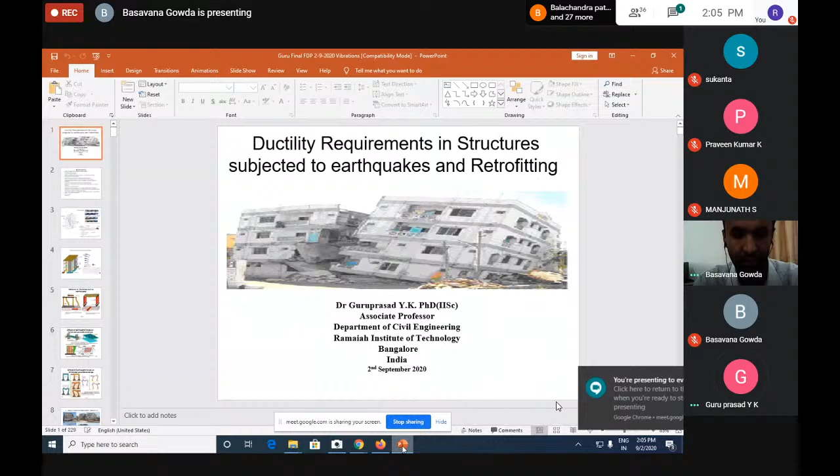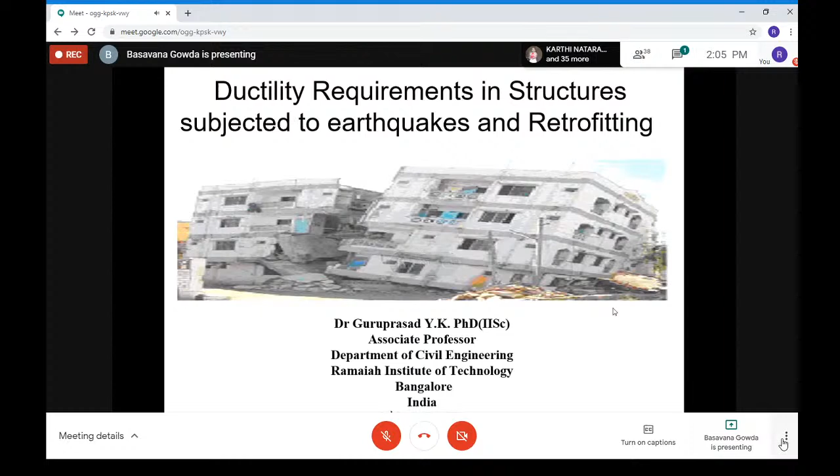I'm Dr. Guruprasad, working as an associate professor in Department of Civil Engineering at Ramaiah Institute of Technology. Today's talk, I'm going to give on ductility requirements in structures subjected to earthquakes and retrofitting.

In the morning today, you would have heard Professor Anand about various aspects on retrofitting and on earthquake engineering. But for the present session, I will be talking more in detail on ductility requirements. I will not go into too much mathematics, because earthquake engineering and structural dynamics are subjects where we make use of a lot of mathematics to get the physics out of the problem.

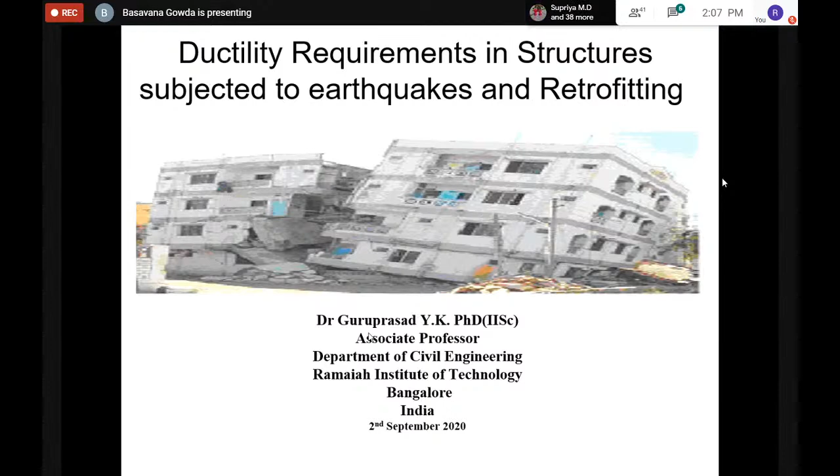So today I will be talking on ductility requirements related to earthquakes, its importance and retrofitting concepts. I would like to also put across that I would not go into too much mathematics. I would stick more to applications and figures which I put across in my entire PPT, such that it is more understandable to all the participants who are from a different range - it may be a professor sitting across, or it may be a student too, from a BTech to an MTech level. So the contents of my presentation goes like this: sources of damages in RCC structures causing instability.

Irregularities in RC structures because of earthquakes, the different types of irregularities which exist, concept of ductility in structures, methods of implementing ductility into a structure through conventional methodologies during the design phase itself, strong column weak beam concepts and pushover analysis. These go in detail into hinge formation and ductility concepts.

A case study will also be presented to you which has been worked upon, and a capacity-based design on hinge formation and stability of a structure subjected to earthquakes - how we are going to implement the concept of weak beam and strong column, and adopting this, how we are going to design based on capacity-based design, I'm also going to talk about.

Assessment of damage in a structure and its members, adopting NDT - non-destructive testing - for damage due to earthquakes, repair and retrofit measures to restore back the stability and strength in distressed RC structures or distressed RC members that have been damaged due to earthquakes, global and local retrofit measures.

One case study of a global retrofit measure, and also a case study of a local retrofit measure which is going to be presented. Passive control techniques - that is earthquake controls, structural controls, what we have in passive controls I'm going to talk about - and conclusion.

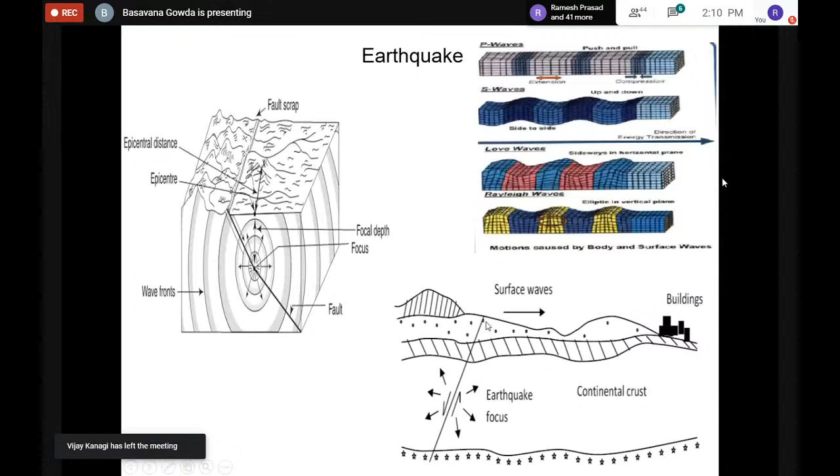Now, the behavior of buildings due to earthquakes is through inertial force action. The earthquake force acts in one direction, but the basic behavior of a building is not to go along with that—there is an inertial resistance force. As we understand in the concept of dynamics, there is an excitation force, and to counter it we have an inertial force, a damping force, and a stiffness force. So to put it simply, there is an earthquake which acts and the building tends to react in the opposite direction such that inertial forces develop to maintain its stability.

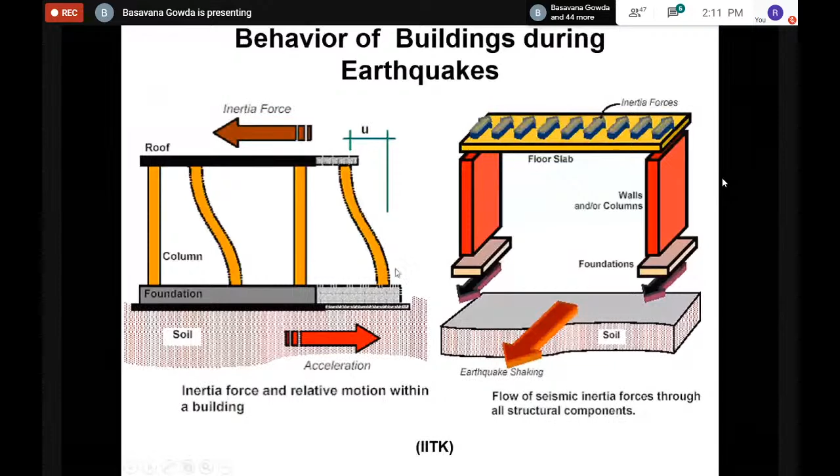Now, what happens during an earthquake in the various components of a structure, especially in the slab, beams, and columns? We see that most columns, when subjected to lateral loads, tend to undergo lateral deflection, and axial loads develop in the beams, causing them to develop compressive stresses.

In the case of an earthquake, there is a figure here showing an infill wall inside a frame. You can see the red arrows showing the lateral loads. Here, even the beam is subjected to axial forces, and the columns are also subjected to, apart from moments and axial force, horizontal shear.

So when we consider this in earthquake resistant design, we have to consider all these forces. In a conventional non-earthquake resistant design, we usually design a column for basically axial loads and biaxial moments. But in earthquake resistant design, we consider axial load, biaxial moments, as well as shear. And in the case of a beam, the axial load is also taken into consideration.

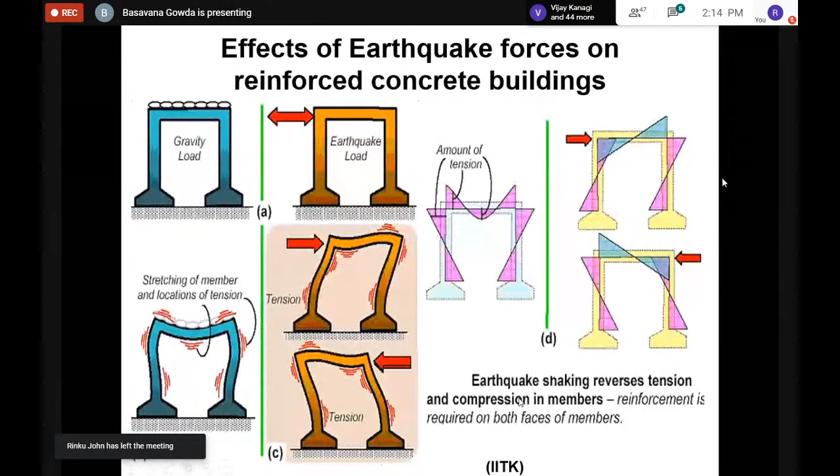What does this show? We have done the RCC design, but still why haven't the buildings been able to resist the earthquake, or why isn't it able to withstand it? Even the previous speaker talked about it, because we can't design for an earthquake of a very large magnitude which may not occur at all, making the building uneconomical from a design point of view. But at the same time, we have to also cater to the needs from a design point of view, such that the stability is restored.

I will be talking about that in detail in the forthcoming part of the talk.

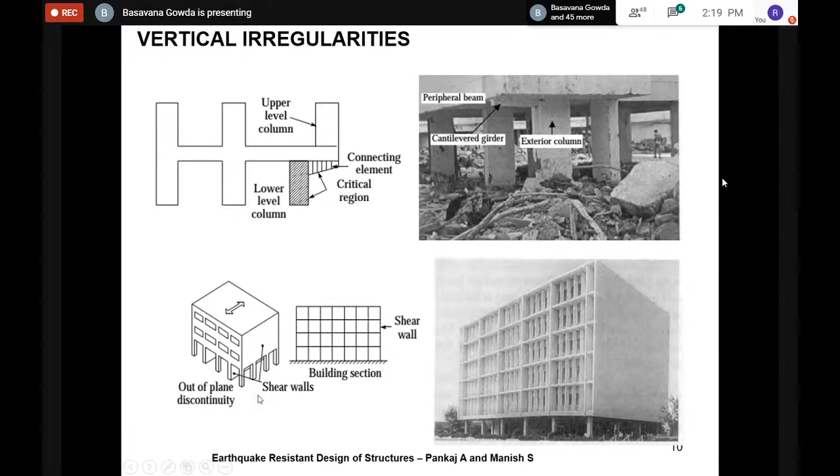Now the next is strength and stiffness irregularity, that is the stiffness irregularity I talked about. If you see this particular building, and in most of our apartment buildings also, we'll see the bottommost ground, that is the basement story, is usually kept open all around for vehicles to move and park. That's fine, but this is going to cause a condition of an open story effect.

What happens is walls have been built into the frames, that is infill walls, causing enough stiffness to the frames above, whereas there are no walls at the bottom, causing lower stiffness to the basement story. So when an earthquake strikes, it's like having a very heavy head and a thin body. What happens when you are pushed? You just fall down. The same thing happens to the building here.

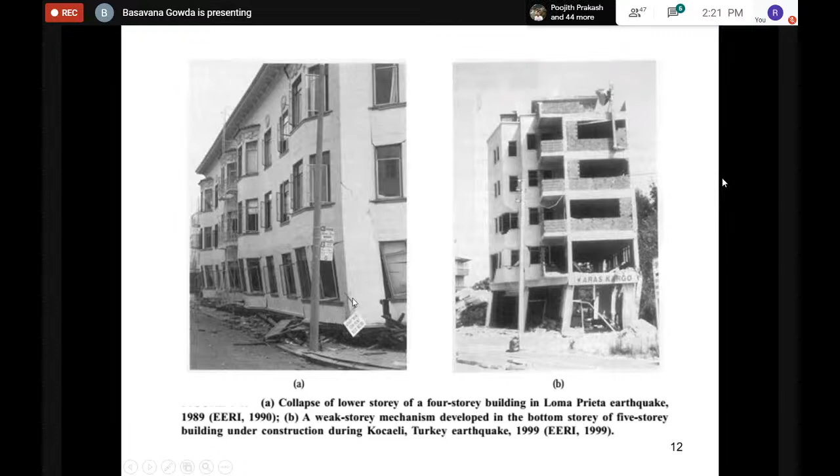You would see the bottommost story here in the basement lacks stiffness, and that also corroborates to the strength. You can see some of the buildings which have open stories at the bottom basement. The columns are not sufficient to resist that particular lateral load, the stiffness is lower in the lower story. In one of these figures to the left, the entire story's columns have crushed and the building has come down.

The next is mass irregularity. One was vertical irregularity, the next was stiffness, then it's mass irregularity. What is mass irregularity? Basically, when you place mass not in the particular mode of design it should be in. For example, I'll give you an example.

Practically what I have come across in our own Bangalore city, I would not like to disclose the details of the project, but most buildings in our country sometimes - let's take the case in Bangalore itself. What happens is, you design a building, it goes for sanction, maybe a residential sanction for 3 floors. But after getting the residential sanction, people also rent out some portions to commercial occupancy, so there is going to be a difference in the load of the structure, especially based on occupancy.

For example, some part of the building is occupied for residential purpose. If you go by IS 875 part 2, it is 2 kilonewton per meter square. At the same time, when you go for a commercial purpose, the live load consideration changes there, according to IS 875 part 2, it goes to 4 kilonewton per meter square, depending on the type of commercial occupancy. In some cases, places are given for storage like a godown. Such differentials in the floor loads are going to cause a mass irregularity.

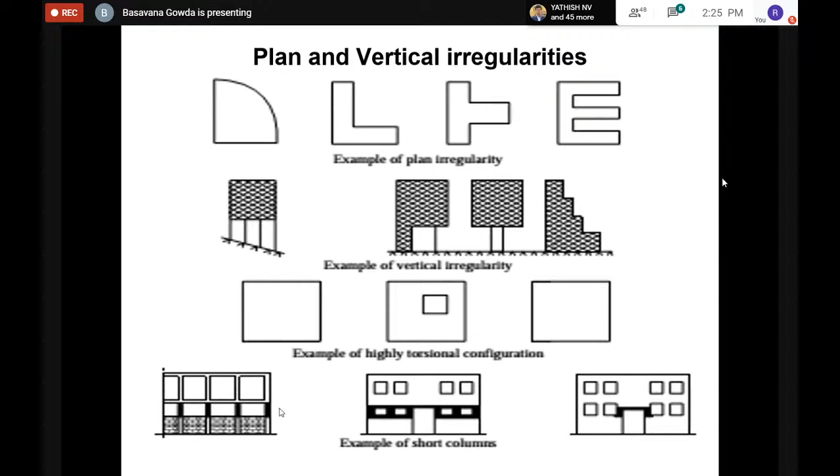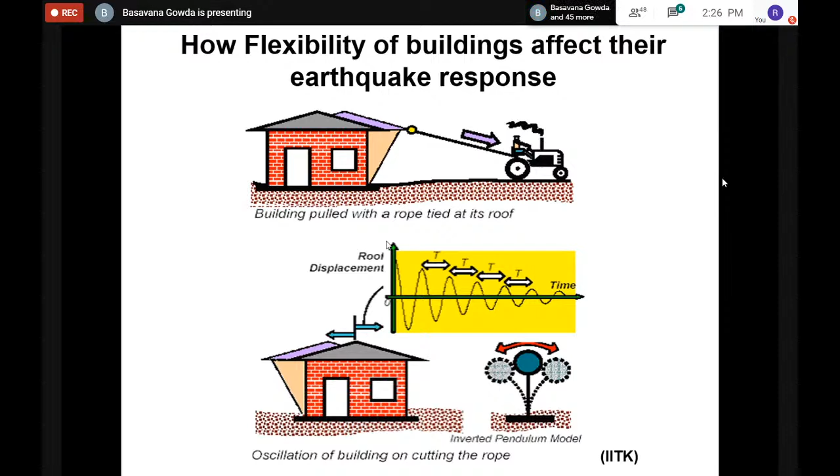Now, first of all, we need to know how flexible our buildings are. When an earthquake takes place, what happens? Basically, it is like pulling the structure. It gives you an idea of just pulling the structure and leaving it, to see how it's going to vibrate.

Based on the height of the structure, you can determine how much damage occurs. For example, from the point of dynamics, a single story building has a time period of 0.05 seconds, whereas a medium low-rise building has 0.4 seconds, and a 15-story building has 1 second as the time period. An elevated water tank, with a huge mass on top, has 4 seconds, a chimney has 2 seconds, and a suspension bridge has 6 seconds.

You'll ask me, how does it matter? The time period refers to how stiff your structure is, and the taller it is, the more flexible it becomes. Most structures standing on Mother Earth are basically cantilevers. The foundation is fixed at the bottom and free on top. It's presumed to be fixed, though it's not truly fixed when you consider soil structure interaction, but conventionally we call it fixed at the bottom. So such structures are basically cantilevers. The larger the height, the larger the displacements, and the stiffness also comes down comparatively.

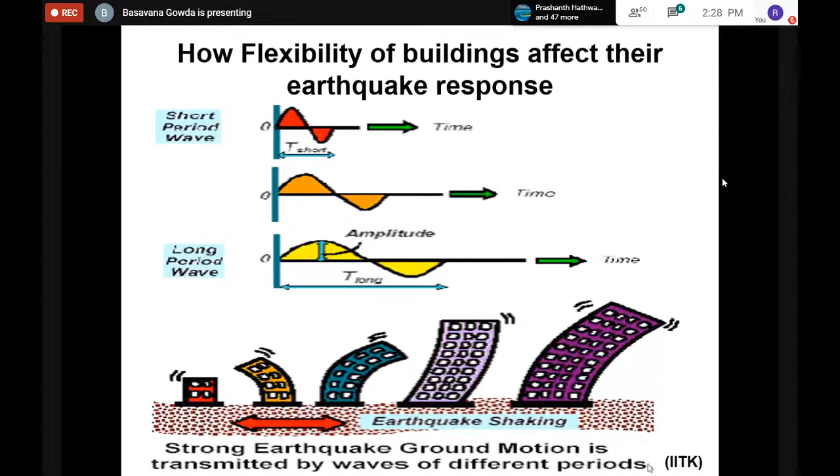At the same time, when there is a strong earthquake, a strong motion, there is a peak ground acceleration which is very high. In such a case, what happens to low-rise structures and high-rise structures? This is a typical figure I've put here so you can get an idea about it. Basically, I'm talking about the basics of earthquake engineering.

Now, coming to ductility in structures. The previous speaker also talked about this. Here, I would also go into detail about it.

Basically, what is ductility? Let us define it and get a clear picture of it. Ductility describes the amount of deformation a structural component or a structure undergoes when it is subjected to a certain load without failing. That is important. This is called ductility.

Now, a structure or a material or a component is said to be brittle when it cannot undergo large deformation or large displacement for the same applied load. It may break. For example, glass is brittle.

Whereas concrete is not - many people say concrete is brittle, but it is not brittle, it is quasi-brittle, because it has a post-peak response. It has a softening part of the curve. So if you take cast iron, you take glass, they're all brittle materials which will just undergo failure without giving any kind of indication, or suddenly they fail.

Whereas we have to design our structures such that they are ductile enough and they do not fail in that manner, because we are going to make use of so many materials put together to erect the structure, and after that the structure should perform well in eventualities like an earthquake. So basically there are 3 types of ductility in a structure: material ductility, section ductility, and structure ductility. Let's see what they are.

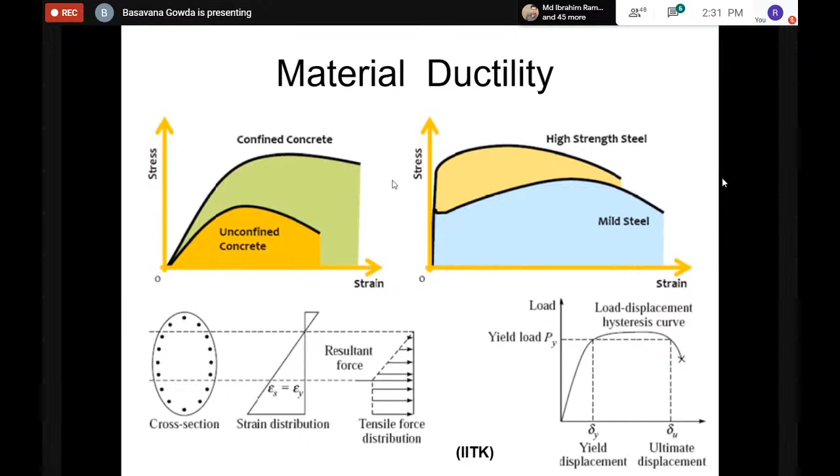So next is section ductility. What do you mean by section ductility? Here you have two cases of ductility: one is rotational ductility and one you have curvature ductility. So what is rotational ductility?

For example, you are going to have a beam, a simply supported beam which is subjected to a point load in the center. I'm sorry, I'm not able to use a whiteboard here, or else I would have just put it across and shown it here. I have a simply supported beam subjected to a point load in the center.

So what happens? The beam deflects to form a curvature. At the supports, the beam tends to have rotations or slopes - they are called rotational ductility. How much each section of the beam rotates - if you draw a tangent to the elastic curve of the beam at each point coming up to the center, you are going to get some slopes. It is basically rotations.

So if that rotation is going to be close to the yielding of the material based on the moment which is going to cause the yielding of the material of the beam, it is called rotational ductility, which takes into consideration the yield moment and the maximum plastic hinge rotation. I will tell you about what is plastic hinge in detail.

Plastic hinge is where the entire material at that point in that particular structural component - take the case of a beam - has completely yielded or plastified. So there is no more resistance there, but the material just gives way and the particular structural component just rotates. So this is rotational ductility.

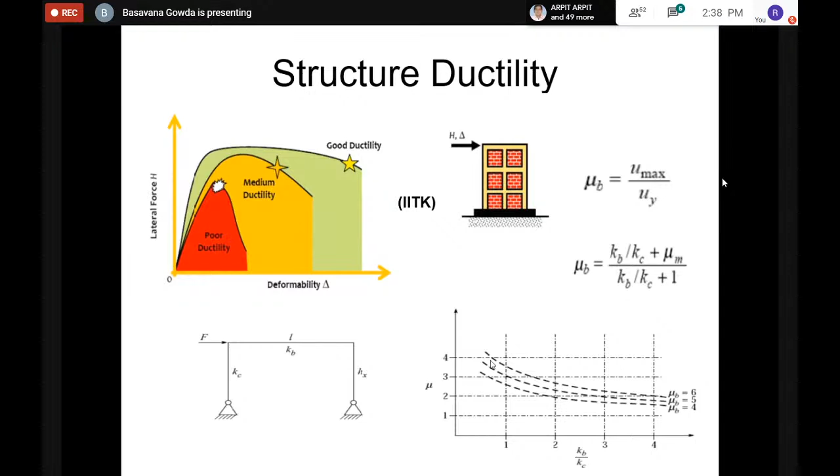Now, how do I enhance the ductility of the structure which I am going to design? That is basically through what we already have in our IS codal provisions. Based on IS 13920, we have our conventional methodologies, called ductile detailing and design, through IS 1893 in conjunction with IS 13920, 2016 codes, which are the latest revised codes.

Now, here there is also a lot of importance given to the lateral, or in the case of a beam, the stirrup reinforcement, and in the column, there is a lot of importance given to the lateral tie reinforcement in columns.

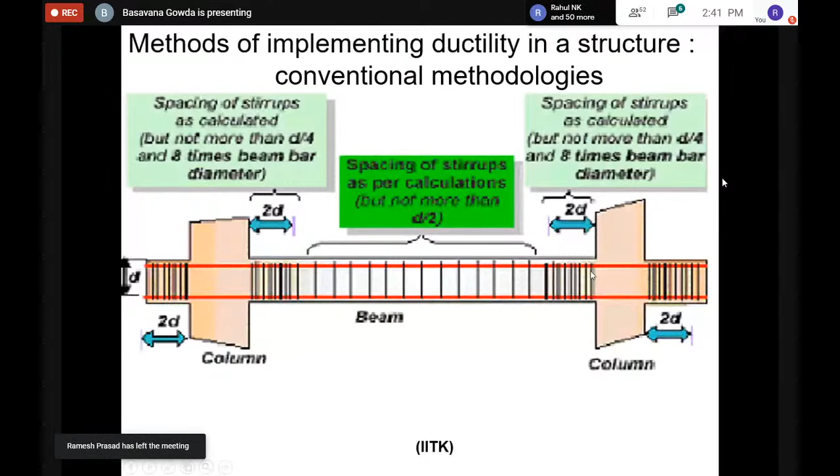It is available in IS 13920/2016, where this particular spacing of the stirrups is to be provided at a distance of 2 times the effective depth from the face of the columns, placed such that you tend to have enough shear resistance at the supports.

At the same time, when we are going to have laps or splices in reinforced beams or columns, the lateral reinforcement, that is stirrups, in the case of a beam, are provided at a spacing not more than 150 mm in the lapping zone, to ensure there is no opening of the lap.

One more thing I would like to mention: you never provide a lap in the central span zone of a beam, and at the same time you never provide a lap exactly at the support into the column. The reason is it can open up at the column due to high shear and dowel action. And when you provide a lap in the central portion, the mid-span of the beam, there is a large moment acting there, causing the tension to be highest at that point, especially at the bottom or in the tension zones, so the lap can open up.

So where do I provide a lap? The lap should be provided in the beam. If the beam has an effective span of L, it should be provided at L/3 or L/4 distance from the face of the support, as far as possible.

But in practical site considerations, sometimes this kind of situation comes up where the lap comes towards the center, not exactly at the center but close to or a little away from it in the span region of the beam. There, stirrups should be provided at a spacing not more than 150 mm in that zone.

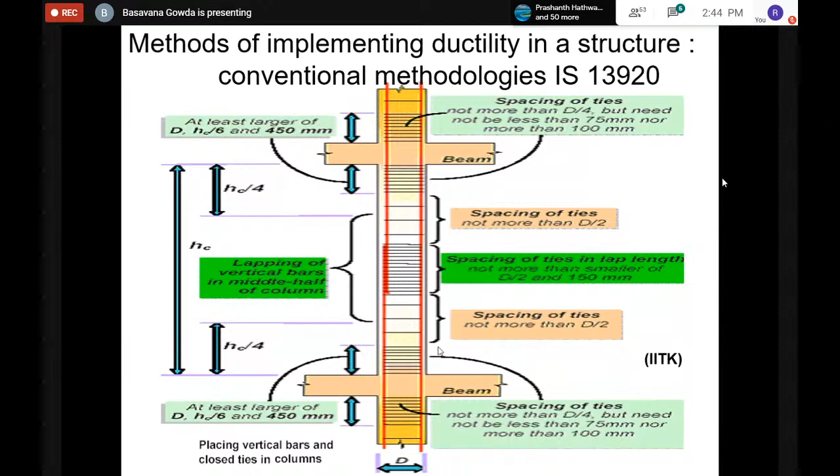Now, as I just told you, in a beam column joint, basically the load, the very large moment which is going to take place, is going to get transferred in the form of bond stresses and diagonal compression and tension.

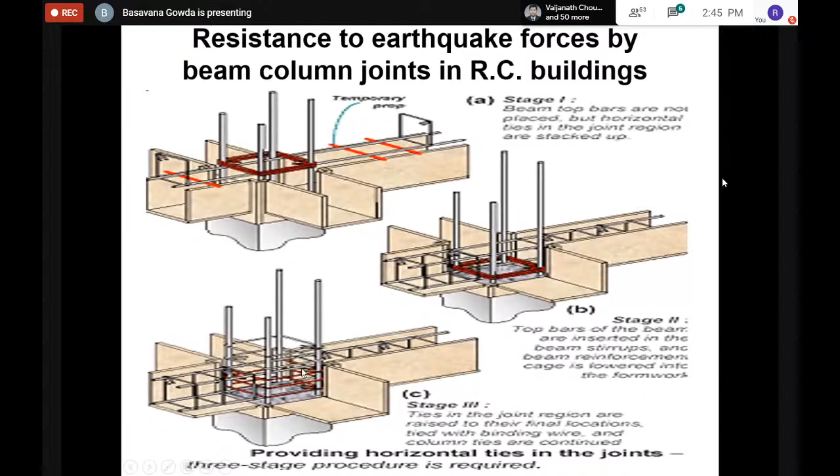Now the next point: I wanted to correlate the previous slide to this. I told you that very high bond stresses are developed, and there is a possibility of the reinforcement getting pulled out. So we have to provide adequate anchorage in the reinforcement at the beam column joints such that the joints do not fail as we saw in the previous figures. The reason is that it causes an interlock, and therefore even if the joint gets damaged, the steel can yield but may not rupture. But if you have given a very small development length, there is a possibility that this reinforcement can get pulled out and the beam can come out as we saw in the figure here.

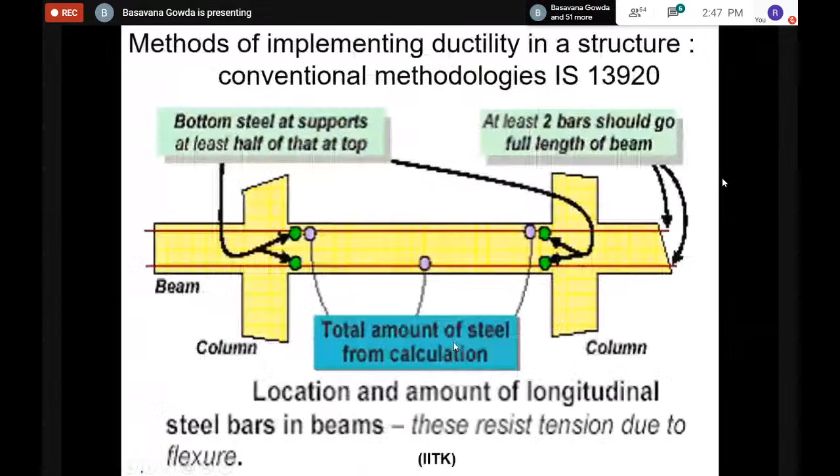Now, I'm sorry, I had to go back and show you. The next is, how do I instill ductility on a structure basis? As I told you, structural ductility, by including or considering shear walls into the design. This is for new designs. When you're going to design the building newly, you're going to construct it newly, consider shear walls. What do shear walls do? They take in plane shear, making the building more laterally stable.

Now, coming to the concept of strong column, weak beam. Many of you would have heard this, and in the previous talk also. This concept is important because the damage which is going to take place at the beam column joint determines whether that particular portion of the structure is going to be stable or not. So basically, strong column weak beam has to be considered. Now what do you mean by strong column weak beam? Do you mean someone may ask, I design the beam to be weak, I'll make it weak, and I'll design the column to be strong? No. You consider the same loads which are going to act on the structure from the stability point of view, from limit state of serviceability, limit state of collapse point of view, and still you make the beam more ductile compared to the column. What do you mean by that?

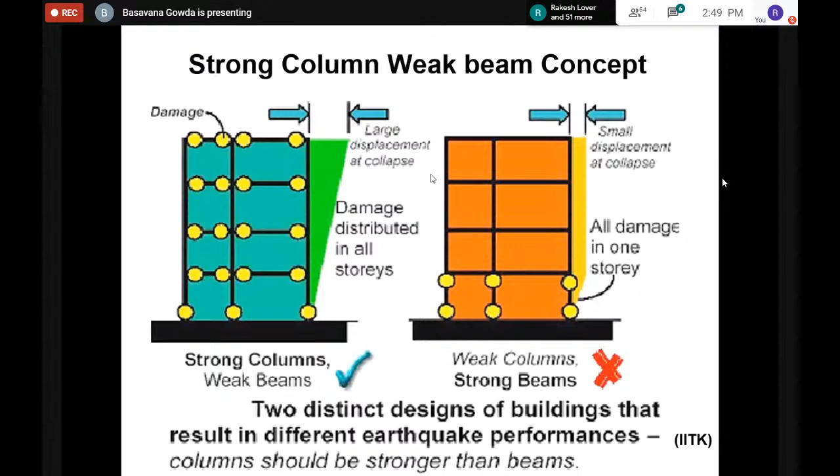I think I'm getting some questions, like should beam reinforcement be induced inside the column for ductility design. I'll come to all these questions and answer them later. I have a huge amount of slides to complete, so I'm just running through this.

You would see here this concept of strong column weak beam. I'm going to run you into pushover analysis. Why do we take this strong column weak beam concept?

I'm going to take you into pushover analysis. We're not just going to talk about strong column weak beam and be done. No, I'm going to take you through how you design to decide where you're going to allow the hinge formation to take place from a design point of view, as a designer, from an earthquake engineering point of view.

That is which we have to design, which we have to decide, not allow the structure to develop hinges wherever it wants when the earthquake takes place. So from an analysis and design point of view, you do a calculated study, analysis and design, and locate the zones where plastic hinges form, and design accordingly.

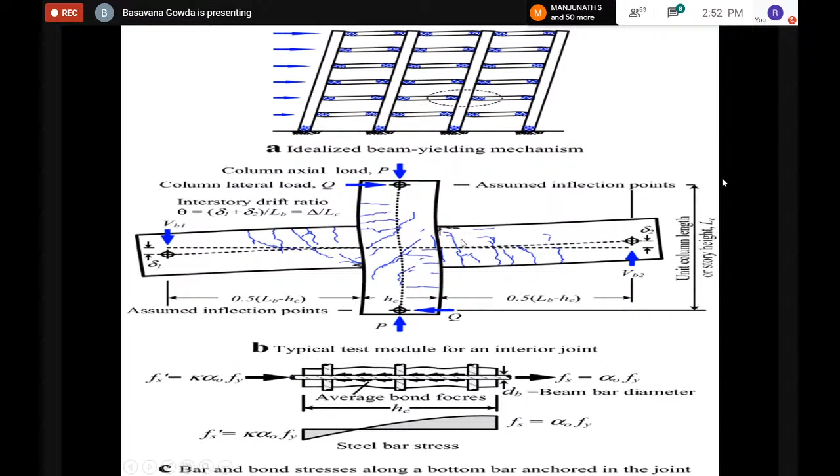Now you see at the beam-column joints, hinges are preferable in the beam region. Next comes methods of seismic or earthquake evaluation. There are two types: qualitative methods and analytical methods.

I collect all the data of the structure from the site. If no data is available in the form of existing plans or structural drawings, we have to go to the site and do the measurements—what is the span, bay span, story height, and the type of reinforcement that has gone in. We use NDT methods also to find the bar diameter, and with at least some documentation, erect a computer model, run the analysis, and simulate the earthquake scenario. So these come under analytical methods.

In this talk, because it's a vast topic, I'm going to focus on pushover analysis. I've considered pushover analysis because I just talked about the beam-column joint and strong column weak beam concept. So what is pushover analysis?

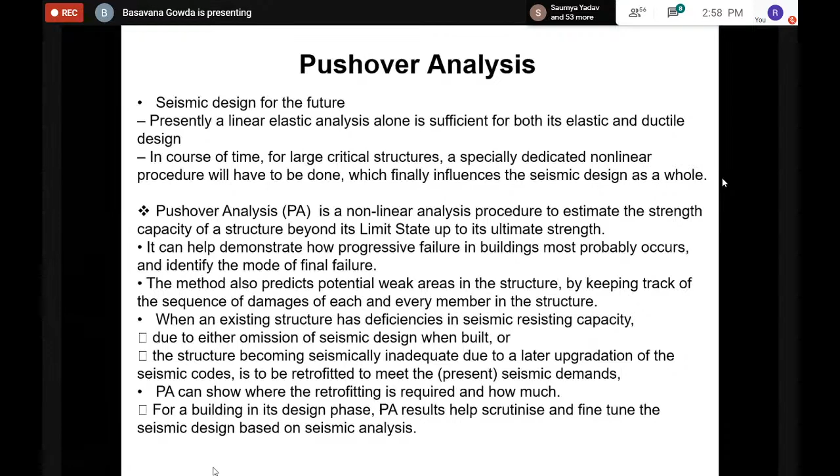Next, pushover analysis is always carried out as a continuation after the seismic analysis. You take ETABS or STAAD or any other software.

You enter the zone factor, the importance factor, the response reduction factor—all of this you are going to enter, along with SA by G based on the type of soil. Once you enter all this, you carry out the analysis.

You refine the design and do the seismic design based on that. You might ask, should I do the design twice? No. First you do the normal seismic analysis, then you do this pushover analysis to find out the possible zones where hinging may occur. I am not going to read word to word.

The reason is that I thought of putting the concept across clearly so that it is clear to you all. Now, for a new building, this pushover analysis, as I told you, is the second stage. The first stage is conventional.

What you can do with this is modify your design. How? You can identify the zones in the model. I'm going to show you the hinges where they are going to form, and how do I do this?

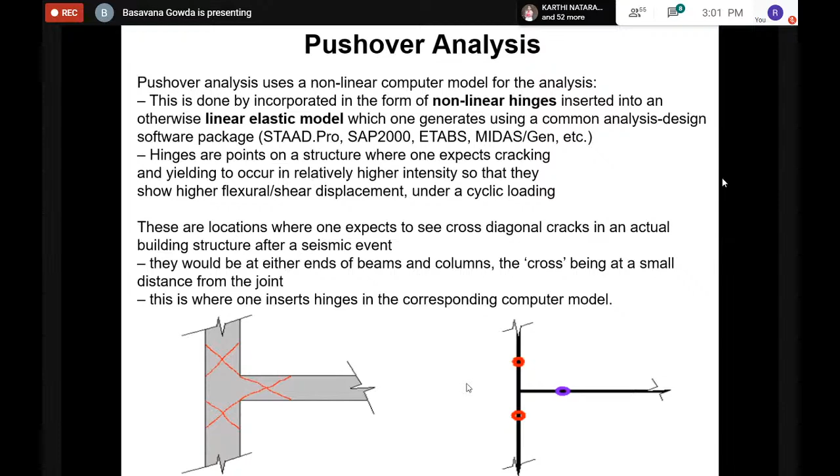So from this, you will be able to get the hinge location formation, the location where hinge formations can take place. Now, what are the different types of hinges that can develop? I'm going to go a little fast, if you don't mind, because I have a lot more to cover on retrofitting and capacity-based design and all that.

Basically, we have three types of hinges: flexural hinge, shear hinge, and axial hinge. You'll ask me, basically these hinges are supposed to develop at the beam column ends only, not at the joint. If it happens at the joint, it will form a mechanism and the whole thing will come down. But basically, it is expected to happen at the beam ends.

And the hinge should be at a distance of at least 5% of the length of the beam from the support face. I would like to inform you, I have not put it here, so I'm just telling you. And one more thing I would like to tell you, you'll ask what is an axial hinge.

You have walls, right? You have infill walls. When the walls undergo compression, they too can crush, as I showed you in the slides earlier. So there an axial hinge forms because of an axial strut action.

So basically in the pushover analysis, we consider the moment versus rotation of the hinge, wherever the hinge formation happens. This entire thing is represented as a curve. The portion AB represents the linear range, unloaded state, or the elastic range basically.

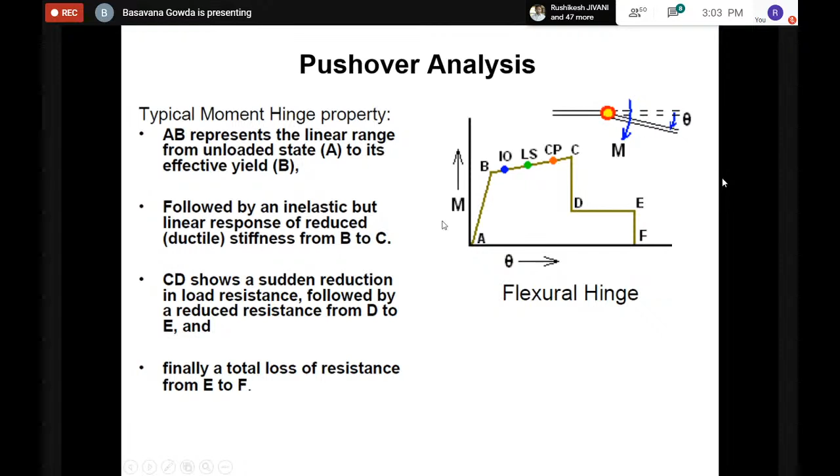It is the portion BC which we take into consideration, which we break up into different zones in the analysis. What is that? Here IO is the immediate occupancy, LS is called life safety, and CP is collapse prevention. Let us see what that is.

Let's see what happens in this case. If your structure is in the IO zone, immediate occupancy, there is going to be some amount of damage, but not to a very large extent.

In LS, there is moderate to a larger amount of damage, but there is no life loss. It should not allow for collapse, that's what it means. And CP is the ultimate point; it should not reach this point such that it causes collapse.

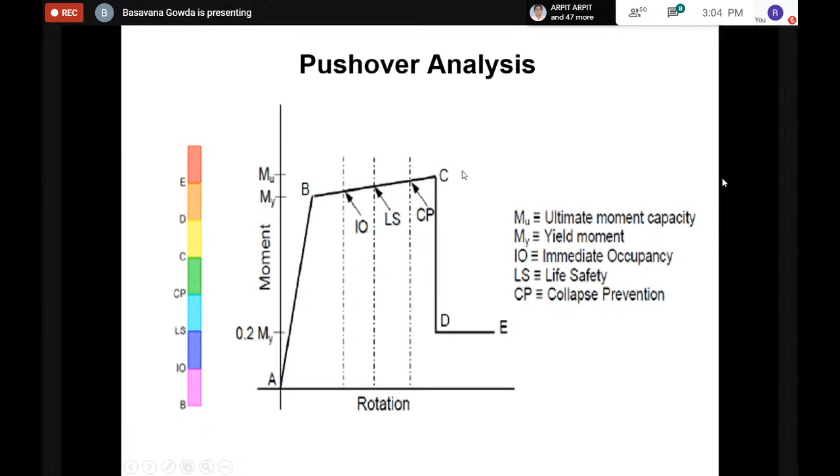We have to look into this, and when you use any of these softwares, it will provide the hinge in a certain legend of colors, whether it is in IO, LS, or CP, or whatever range. So it should be within CP. If it goes to the red zone, it has gone beyond CP, and after that point it is definitely going to collapse.

So I would like to put across, I'll go a little fast here. So basically the pushover curve, which is what you are going to develop here. How do you develop that with respect to base shear?

What is base shear? It is the shear acting at the base of the particular building, computed from the horizontal acceleration coefficient AH, given in IS 1893:2016, based on considering the zone, importance factor, response reduction factor, meaning what kind of frame it is—whether an ordinary moment resisting frame or a special moment resisting frame with ductile detailing—and also the type of soil, which goes into the spectral acceleration, SA by G, with respect to the rooftop displacement considered.

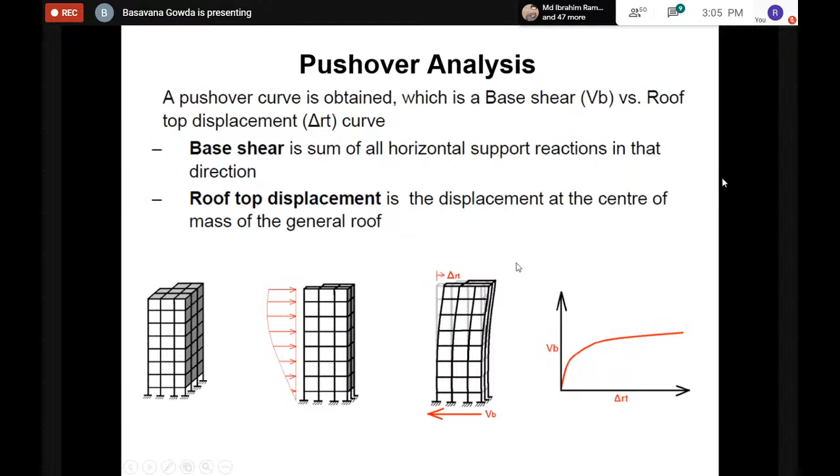With respect to this, you make your pushover curve. So what do you do with this? With this pushover curve, I would like to go forward a little.

What are the effects of torsion on beam column joint? I will come to that later. I'll answer all your questions later. Okay, please kindly bear with me. Let me finish up with this talk.

So here, SA is the spectral acceleration and SD is the spectral displacement, which we call the maximum displacement the structure undergoes. Peak, we call it peak ground acceleration, and we have peak ground displacement also. But SD is the spectral displacement.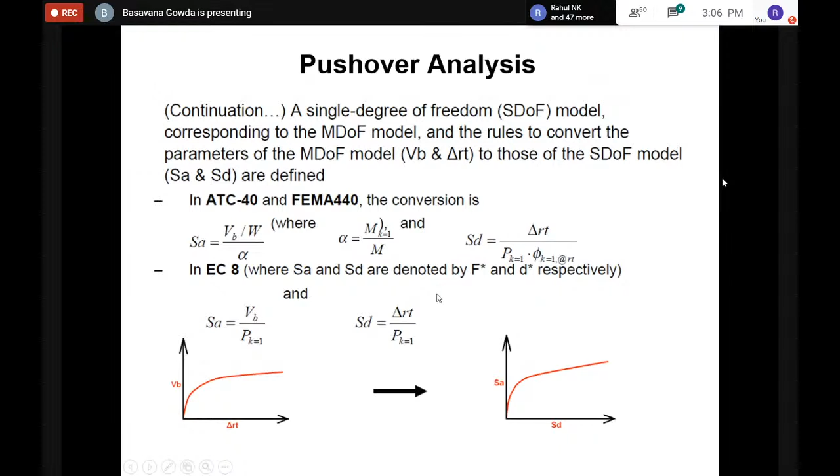As I just explained, SA is the spectral acceleration and SD is the spectral displacement, and you'll have spectral velocity also, SV. I don't want to get into that right now. I wanted to explain all this, but I would like to go a little faster. I'll take up questions later on this, if you have any.

We developed this pushover curve, SA by SD, based on ATC 40 and FEMA 440. What is it that we are going to get from this? I'll just come to it.

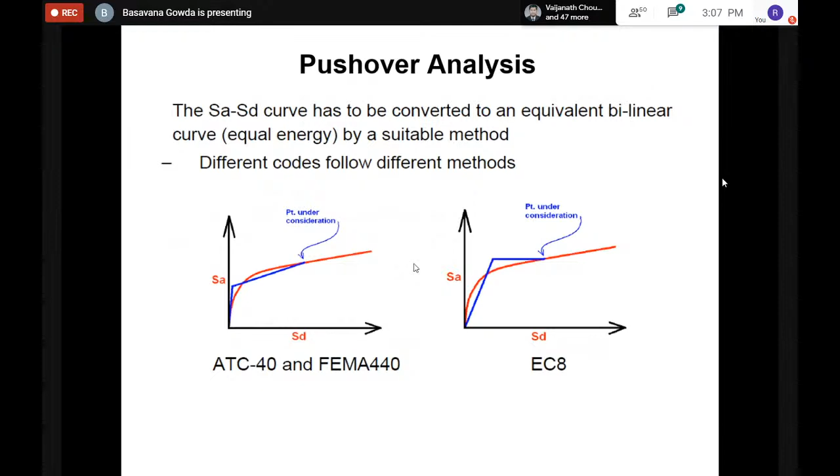From this, we are going to come to what would be, and where would be, the plastic formation. So there are two types of pushover analysis existing: the displacement coefficient method and the capacity spectrum method.

Basically, what is done even in our software, we go with the displacement coefficient method. So here I would very briefly talk about it. What is the displacement coefficient method? It estimates the target displacement prior to the analysis, to which the model has to be pushed.

What does that mean? You predefine the roof displacement in this method. Basically you are going to predefine the roof displacement. How? I'll tell you. You are going to define the roof displacement, and up to that point, analytically you do the calculation in the software.

And due to that, it's like F is equal to K delta. You are going to give the displacement, and you are going to develop what are the forces which are developed in the members—that is, forces and stresses. And from that you get to know where the hinge formations would take place.

This is based on the displacement coefficient method. The capacity spectrum method involves analysis done at each point on the pushover curve, and it is consecutively checked whether the SA by SD at that particular point meets. It is more of an iterative process. Basically, the response spectrum curve is reduced by a reduction factor in this case.

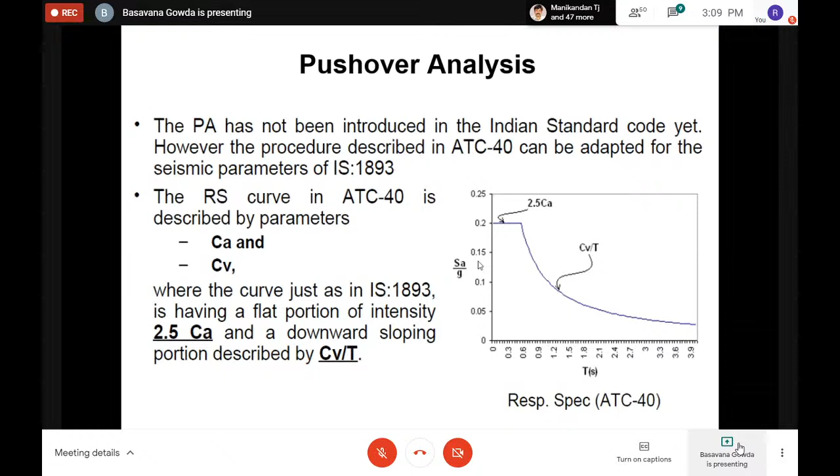So I would like to put it here that this is the response spectrum which is considered according to ATC 40 for pushover analysis. So you take 2.5 Ca as the SA by G, whereas in our Indian code IS 1893 also we consider this.

Just now I talked about the horizontal acceleration coefficient Z by 2, I by R, into SA by G, which is considered for pushover analysis too. For pushover analysis also you have to give the zone factor, I, R, SA by G into the input when you are doing it, whether in SAP or in ETABS.

I would like to show you a case study which I carried out, working with my students. This is a commercial building where M35 grade concrete was used for columns, M25 grade for beams and slabs, and M35 also for shear walls.

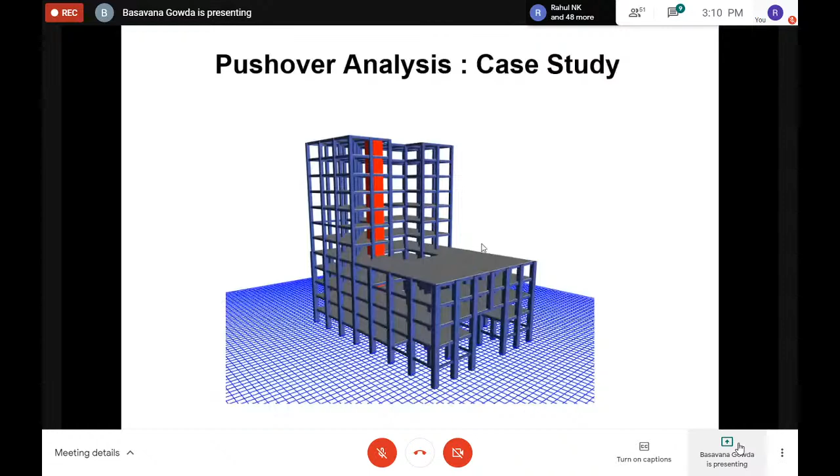A live load of 4 kilonewton per meter square was adopted, and this was the pushover model considered. It was a building, and you'd see that without the shear wall, when the analysis was carried out, we developed hinges beyond this point.

I'd like to come to this point, I'm sorry the legend is not here, but I'll show you we have B, C, D, E in that curve shown on the pushover curve. This showed that without the shear wall, many plastic hinges were formed on the upper levels of the structure too, so the building is not really stable.

Let me tell you, the legend there and here is different. The one beyond D is in pink and red. It means these hinges have already formed, which are going to allow a mechanism to happen - meaning this particular structure is going to collapse. That's what it says, and this analysis was carried out in ETABS, let me inform you.

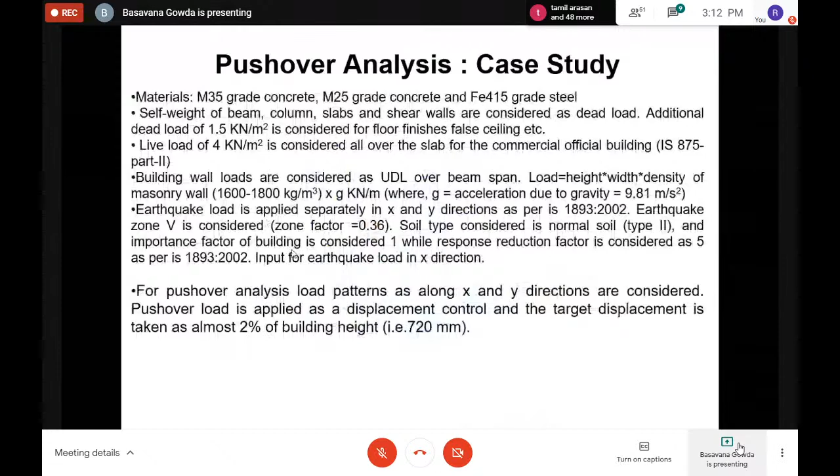With the inclusion of a single shear wall, the hinges developed in the structure subjected to an earthquake changed. This is a seismic analysis through pushover analysis - let's say it is in zone 5 and soil type 2. It made the hinges jump from the pink zone to the green zone just by inclusion of a shear wall. You may think this is just an analysis.

Actually we have done this - I would not like to name a particular project - they had asked us for an assessment. Based on that, this has been done and given to them, to answer whether it is safe or not.

You would see there is an extended portion on top - the building had to be erected for an extended portion, the portion which is projected up. It has totally, 1, 2, 3, 4, 5... 12 stories. So up to 5 stories they had, and the 6th story was already present.

They wanted to put another 5 more stories. For that, they wanted an analysis to know if it's safe or not, because it was in an earthquake zone. So it was being done to show this.

I wanted to put this on record to show you that when you do this in these particular packages, you get an idea about whether it is safe or not. You would see some part of the structure has no plastic hinge formation, in this particular case where the shear wall has been introduced.

Actually, that building didn't have a shear wall - I'm sorry to say this, but on record, right? They didn't have a lift wall, which was supposed to be an RCC shear wall. As many would agree, even in today's buildings raised beyond 3 floors where the lift core is provided, sometimes there is a frame structure constructed with masonry walls built around the lift, and no RC wall is provided. I'm telling you the practical scenario. That was the same fate in this building - that is why no shear wall was considered. We did this analysis.

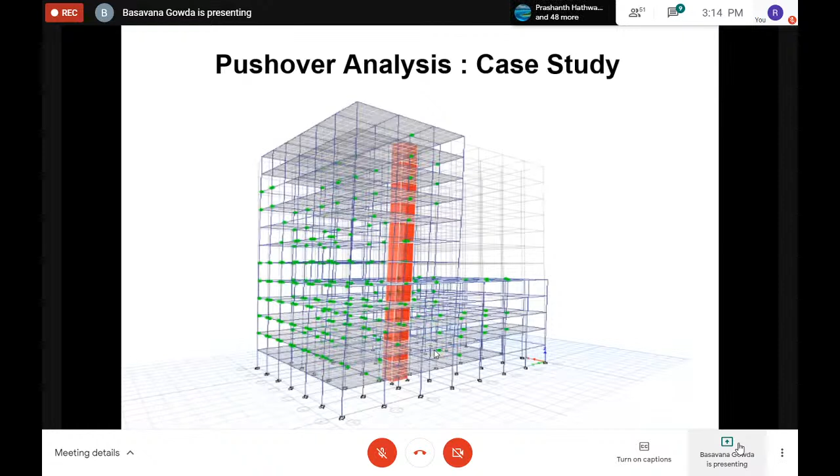Okay, I would like to run through capacity-based design. Because I have less time, let me say - you see these plastic hinges have formed, right? I introduced one particular shear wall here and this building has got green, meaning they are within immediate occupancy or lesser than immediate occupancy damaged hinge zones.

Now, if I have to take this into consideration for design, what do I do? I have to consider the design such that reinforcement is provided in such a way that hinge formations take place at the beam ends, and there are no hinge formations in the columns.

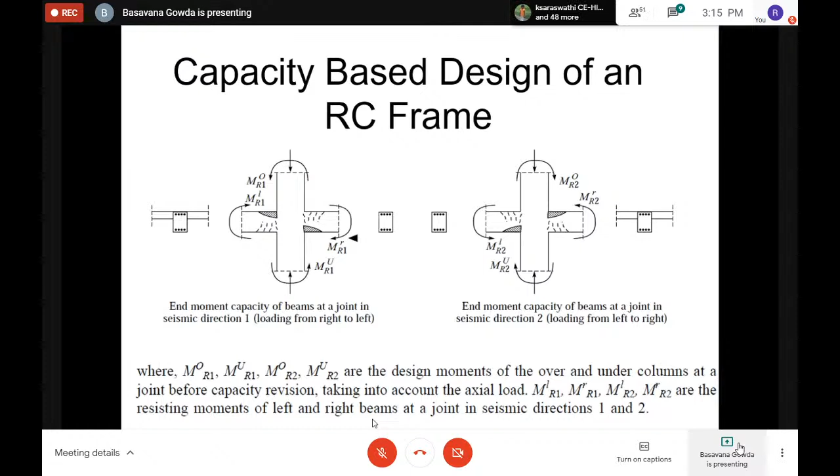ML R1, MR R1, ML R2 and MR R2 are the resisting moments of the left and right beams. What do you mean by resisting moments? It is called the moment of resistance of the beams - the limiting moment of resistance of the beams.

Based on this, we consider something called the moment magnification factor. The moment in the column above and below the joint should be greater than or equal to a factor gamma RD into the mod of the moment - mod meaning it can be positive or negative - times the moment of resistance of the beam to the left and right of the joint. If it is not greater, it is as simple as this.

The addition of moments of the columns above the joint should be greater than a factor into the addition of the moment of resistance of the beams to the left and right of the joint. When you take that ratio, you should not get it less than a particular value. Let me put it now since there is a dearth of time - I have to tell you this way so you get an idea.

This gamma RD is called the overstrength factor for strain hardening. It is usually taken as 1.35 according to Eurocode 8, which we also take into consideration for our analysis.

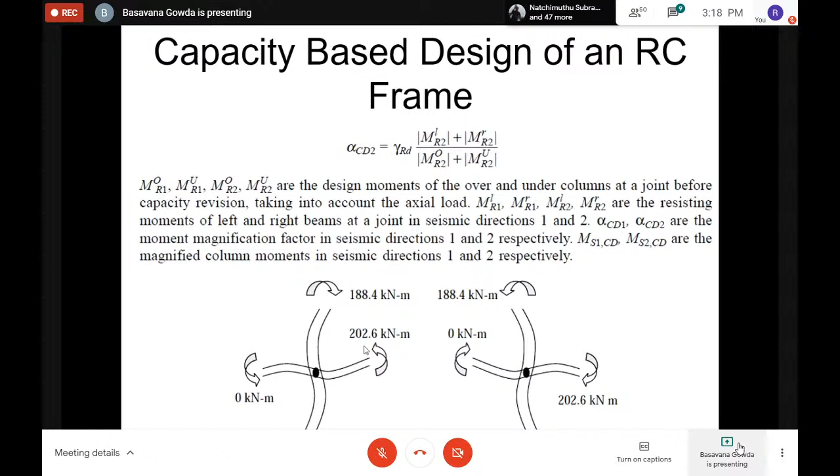So in simple terms, through a calculation procedure, I multiply this column moment by a moment magnification factor to enhance it so that it reflects into the calculation of the area of reinforcement in the column. The beam is kept the same, so that it becomes more of a strong column, weak beam concept.

Let me just run through this. This is an analysis carried out on a frame taken into consideration. You see the axial load and column moments for all the columns, 1 through 12, and these are the moments of resistance for the beams at the ends.

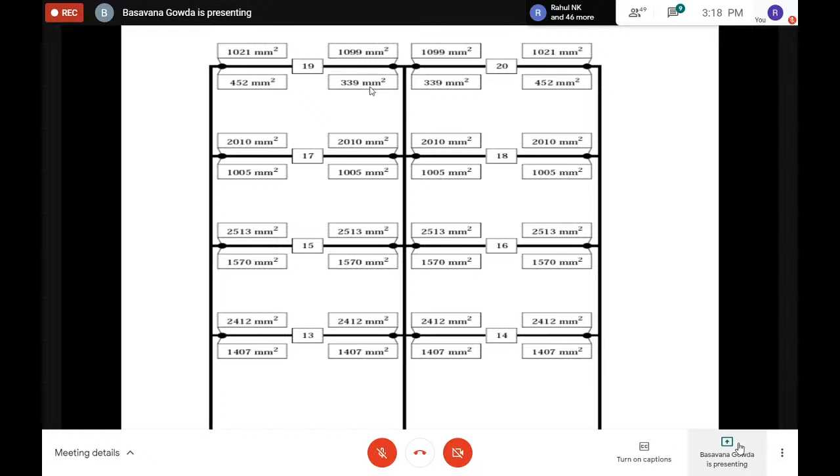You take this into consideration and first find the areas of reinforcement in the beams. Then you do a capacity-based design analysis to check which columns are deficient or have lower moments compared to the beams, and determine the moment magnification factors for all the joints.

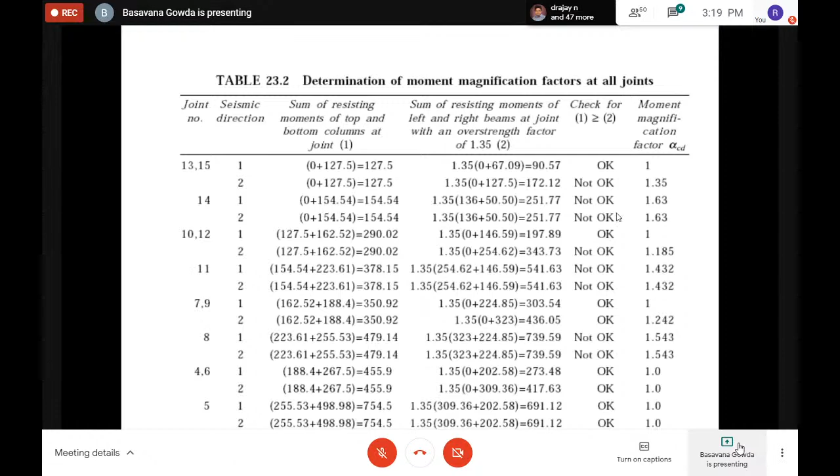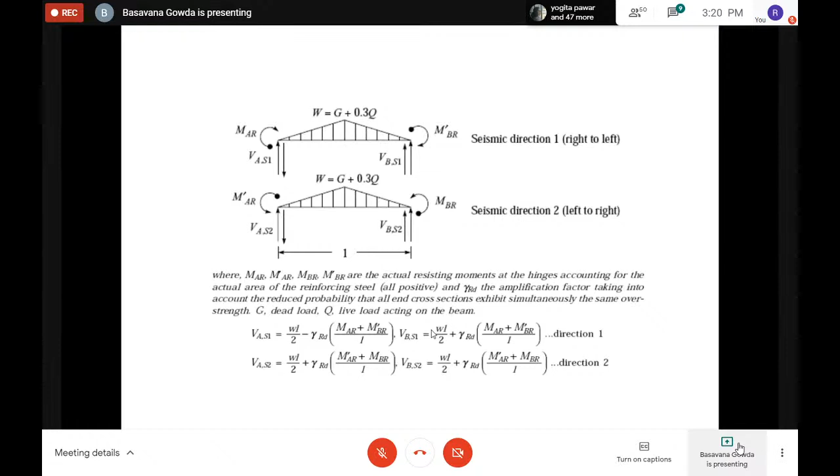So you do the lateral calculation of the shear on the columns, and you are also going to design the lateral tie spacing. Sorry, there is IS 13920 1993 - it's not 1993, it's 2016, which you have to use.

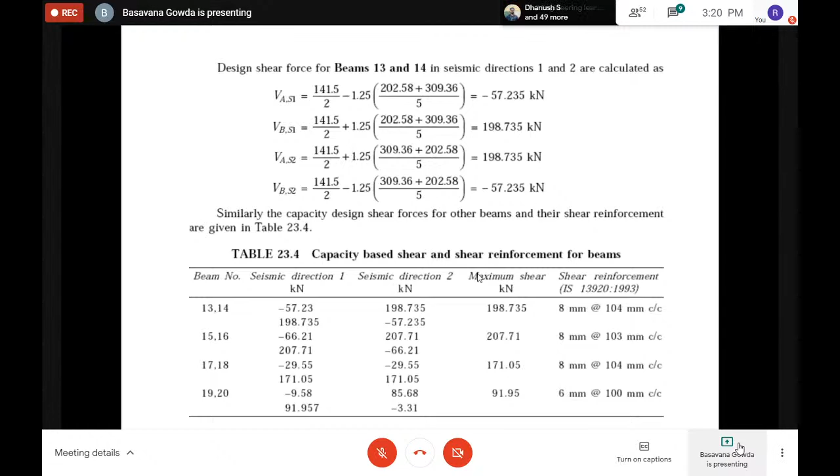So you have to take the moment as well as the shear into consideration, and you are going to design the lateral ties into the columns also, based on shear consideration. Please mind you, for the columns it's based on shear consideration. So in the previous case you have 8 mm, this goes into 10 mm. After you do that, you do the ductile detailing completely based on your capacity based design, such that you allow the hinge formations to take place only in the beam.

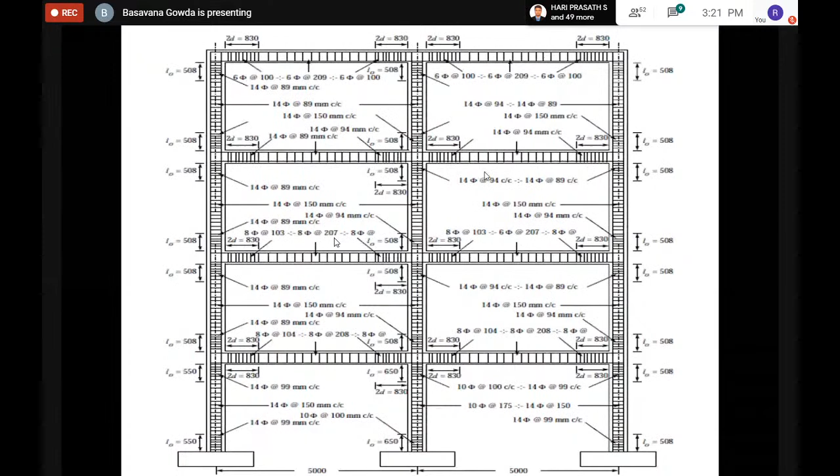Now coming to the retrofit option, coming to the case of retrofitting. What is retrofitting? We are going to enhance the load carrying capacity of an already existing structure for any enhancement for loads that are going to act on it, or we are going to restore a damaged structure to its actual capacity, load carrying capacity, or beyond it.

Now these retrofit techniques are of two types, global or local. What do you mean global? As in a structure as a whole. Global means adding new shear walls, infill walls, adding bracings, giving a larger thickness to the walls, mass reduction in stories, supplemental damping and base isolation. That's what I'm going to talk about later. And local retrofitting is basically RC jacketing.

Local means what? You're going to attack only the members - beams, columns, slabs, foundations - which I'm going to show you very quickly. Jacketing of beams, jacketing of columns, jacketing of beam column joints, strengthening of individual footings. Jacketing can be RC jacketing or carbon fiber reinforced polymers, which can be used - CFRP, carbon fiber reinforced polymers, or glass fiber reinforced polymers, which you can adopt.

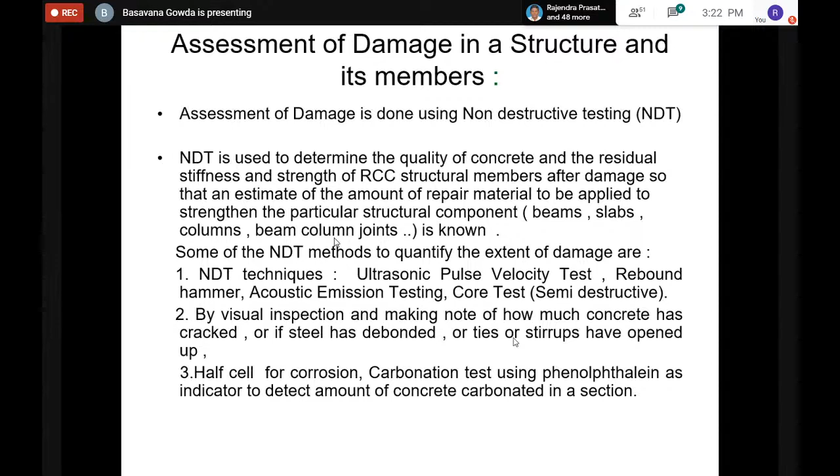So damage assessment first - before we go into retrofitting, we have to do a damage assessment. Most important thing. The various types of damage assessments are ultrasonic pulse, rebound hammer, acoustic emission, semi-destructive core test, as well as through half cell and carbonation test. I will just briefly run through that.

You see that non-destructive testing using ultrasonic pulse velocity is done to know what is the existing quality of concrete, and also to an extent what is the dynamic Young's modulus for concrete whose strength is not greater than M25. Because if you go to high strength concrete, the density will not vary much, you will not get much variation in E. That is what I would like to put across.

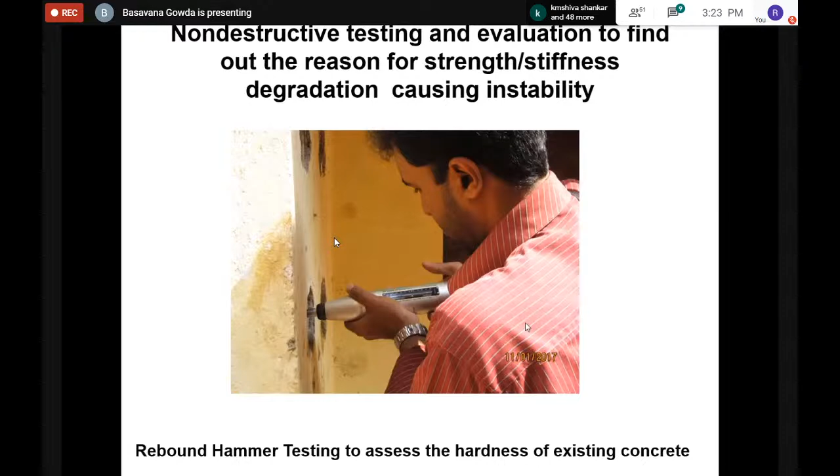So these are the non-destructive testing methods: ultrasonic pulse, rebound hammer. Rebound hammer gives you the surface hardness of the particular concrete to know what hardness level it has attained, and today you have the latest digital ones, which give you the compressive strength also. But you have to do all of them, you can't just do one of them.

Then half cell, which is used for corrosion detection, and you also adopt what you call carbonation test to know what is the amount of concrete which has got carbonated, which is directly related to corrosion. Actually, the more the particular concrete is carbonated, your steel inside can get corroded.

This is a case of a project which I worked with one of a senior, a senior design person in Bangalore. It's a project here in Bangalore itself, which we have done the assessment for, and also taken the core test.

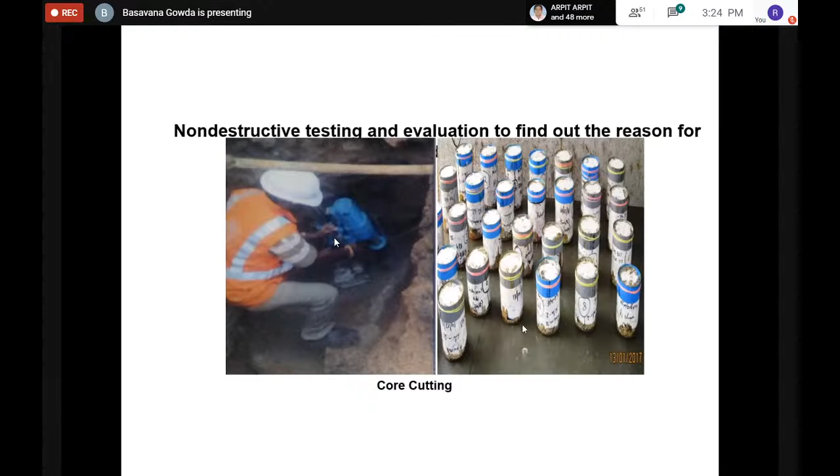You can see a photo here, a core test taken out of the foundation footing to check the in-situ strength of concrete. This is not non-destructive, it's semi-destructive. You also see here a cover meter being used.

Now, when you don't have any details of the structure, how do you know the reinforcement inside a structure which has damage due to an earthquake or whatever? Use a cover meter, also called a profometer, which gives you the spacing of the reinforcement, an average diameter provided, and also the cover.

After all this, you do a condition assessment. You come to a conclusion: is the particular structure fit enough for retrofitting or repair or not? You do the repair or retrofitting only when the damage is within repairable limits. You also have to do a cost-effectiveness analysis to see how much the retrofit will cost compared to new construction. Usually the retrofit will be cheaper when the damage is within repairable limits.

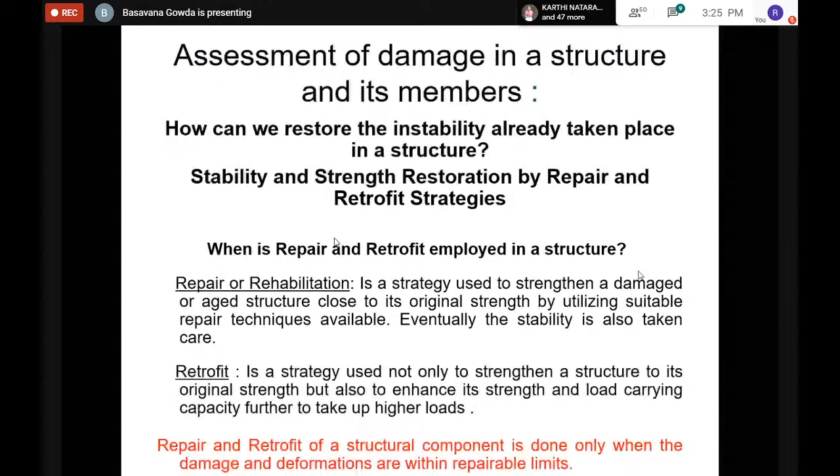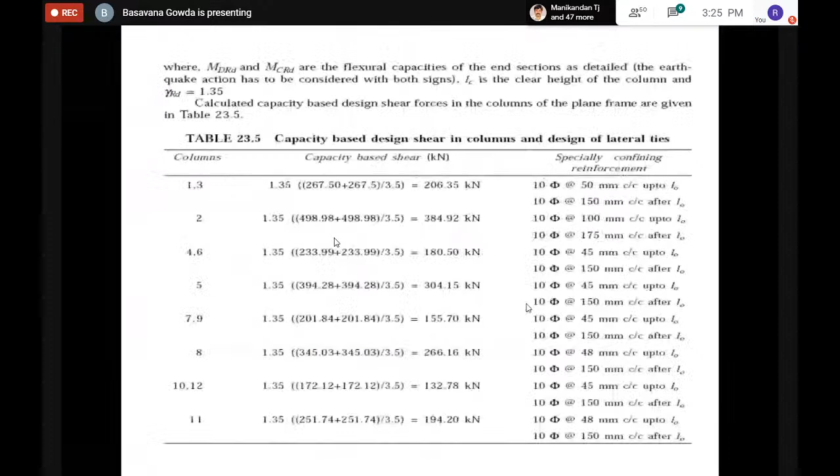Okay, you have to keep this in mind, that's why I put it in red. You can't take a structure which has damage like this and retrofit it. I'd like to put this on record: you can't take a structure that has fallen down like this and retrofit it. You can't put a quick fix and put it back, that's not possible. So what I mean is, you have to assess what percentage of damage the structure has undergone.

Now the materials adopted for retrofit are epoxies, FRP, carbon, CFRP, GFRP, cement-based mortars with epoxy in it, epoxy to bond old and new concrete. Especially in Fosroc itself you get Nitobond EP, and also chemicals to bond concrete and new steel where you have to drill in.

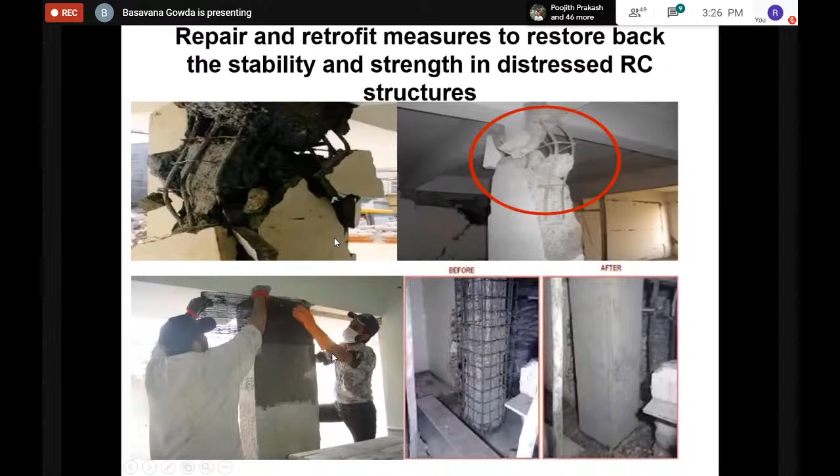I'll show you some quick photographs here where you'll see carbon fiber RC jacketing done to columns which have been damaged, CFRP damage where CFRP repair has also been done. You can see here RC jacketing which has been done. This is RC jacketing in the case of a flat slab also, carbon fiber reinforced.

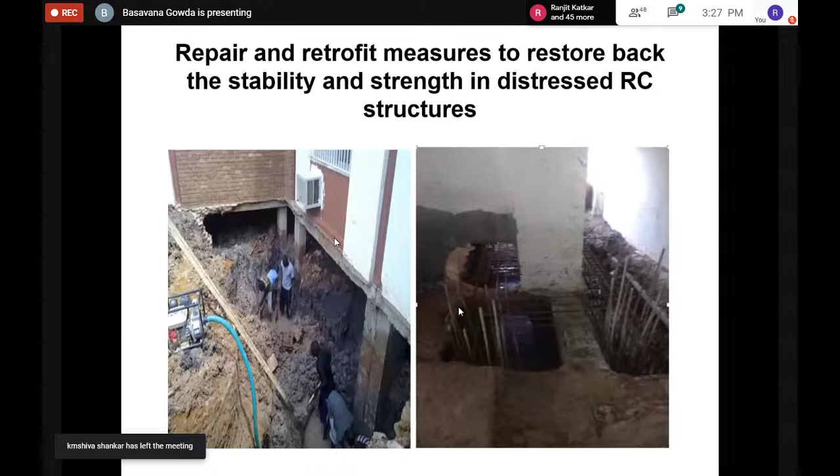You see shear walls being erected, new shear walls, as a retrofit measure for earthquake resistance. The structure has already been built. This is an already existing structure where they had not built shear walls. They have new shear walls now, and the columns are also being jacketed to increase capacity. New shear walls have to be erected in this manner.

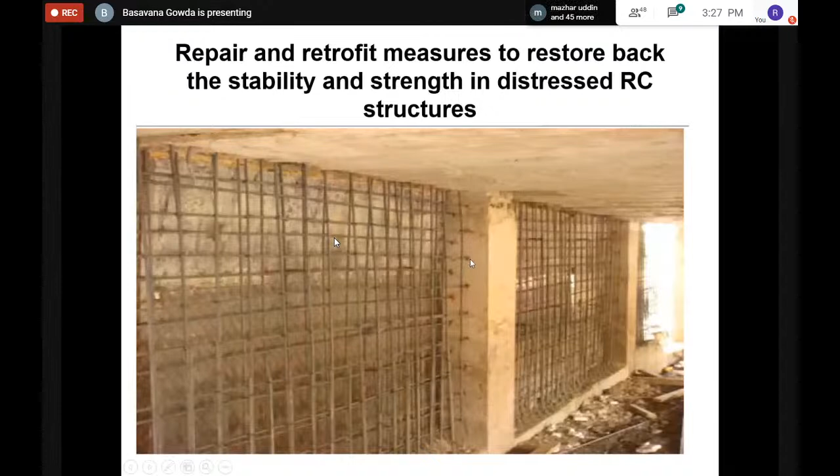You see that chemicals have been used, epoxy chemicals to bond the old steel and new steel along with the concrete. It has to be welded, it's better to be welded.

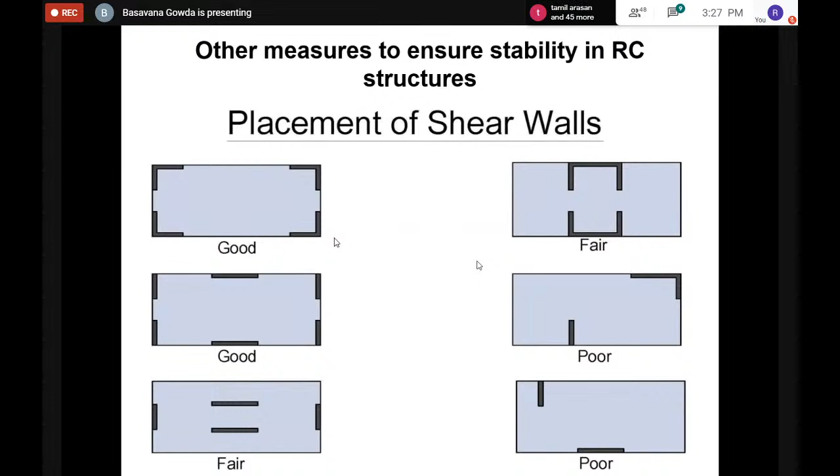New shear walls are being erected, and the new shear walls which have been placed should be symmetric in plan. Even though it is erected in an already existing structure, the plan should be worked out such that it is placed properly, symmetric in plan, or else the retrofit becomes useless again. The shear wall gives better lateral load resisting capacity, increasing the ductility of the structure too.

FRP is another type of repair. Now, when do we go for design of a repair? When there is insufficient material strength, which you get to know when compressive strength of concrete has decreased from your NDT and condition assessment. There is a deficiency in size of the sections provided, cross-sections of the members, due to damage taken place in the structure at a material level because of earthquake.

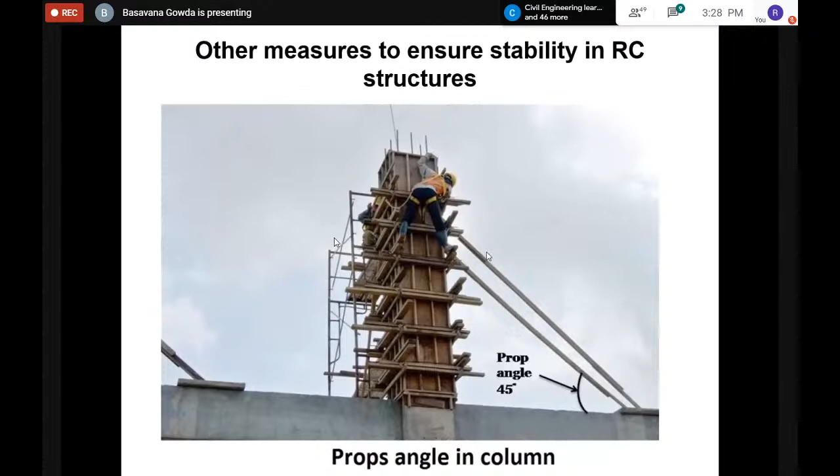Lack of verticality of columns, especially I wanted to put that figure here. See, they have not maintained the centering properly. You will see this in many structures, it's a fact, they don't maintain the plumb, I mean the verticality. In such cases, when the earthquake takes place, there is higher likelihood for damage, and settlement of structure due to poor ground and soil conditions.

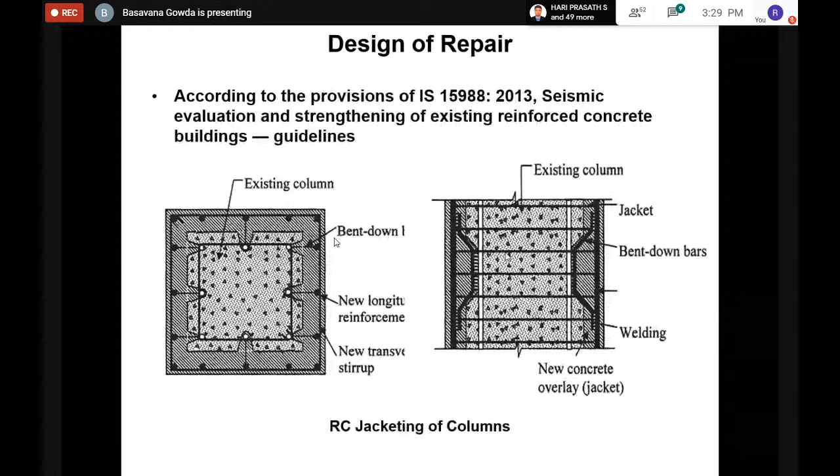Another seismic retrofit I want to put on record. The IS code for seismic retrofit is IS 15988, used for RC jacketing of existing structures. Seismic evaluation and strengthening of existing structures is IS 15988:2013, for both RC jacketing and FRP, which you can use to design. For FRP, ACI 440 has to be used because we don't have any Indian code for FRP repair. I don't have time to run through this, but I'll come to it later.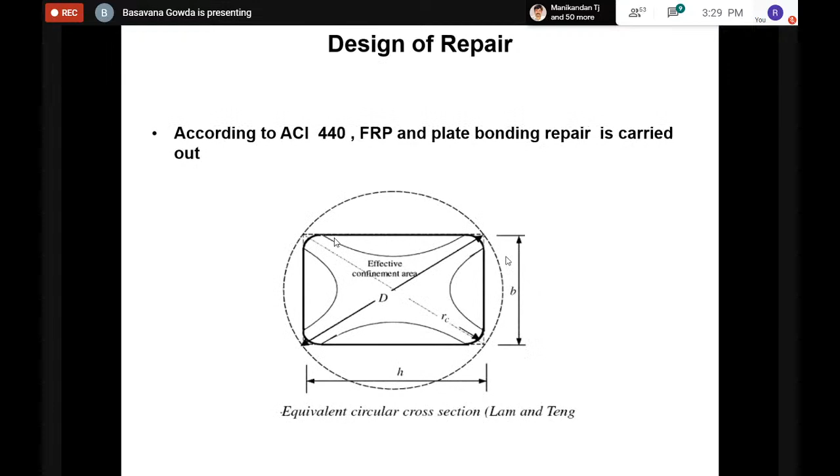It's basically to enhance the compressive strength of concrete. The confinement needs to be increased. Another way is to provide infill walls.

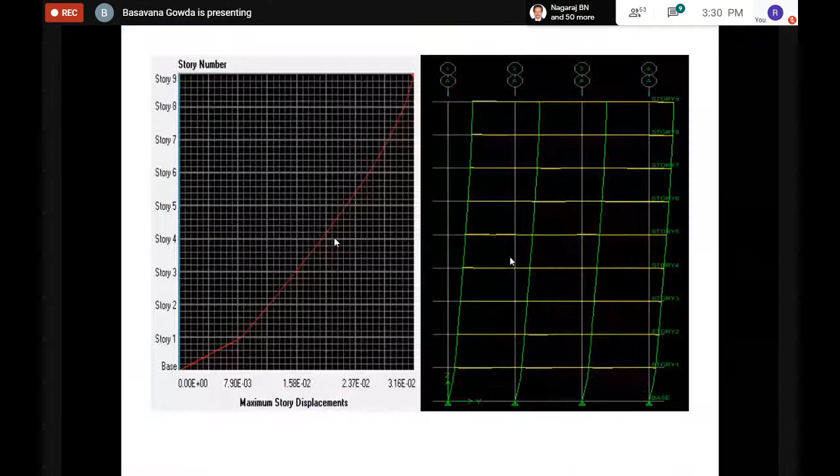I would very briefly run through a case study I've done, a global retrofit where a shear wall was introduced in an already existing structure, out of Bangalore, which we have done. It's an older file because it was done earlier. You can see the shear wall, the building didn't have a shear wall. We tried various combinations before providing it. It was a large structure, 9 stories, so we wanted to see what the story drifts would be.

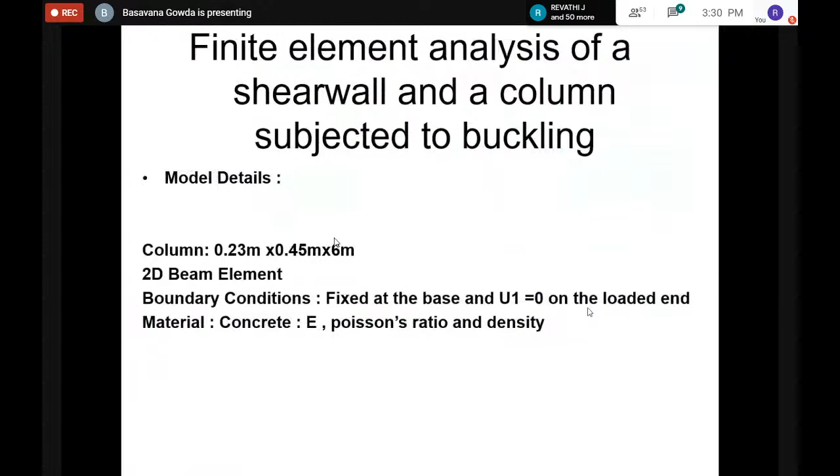Eventually, not only from ETABS, we also did a finite element analysis to see which would be better, to see the variation of the shear wall and whether we should introduce extra shear walls or columns. We found that the shear wall was a better option and feasible compared to the long term.

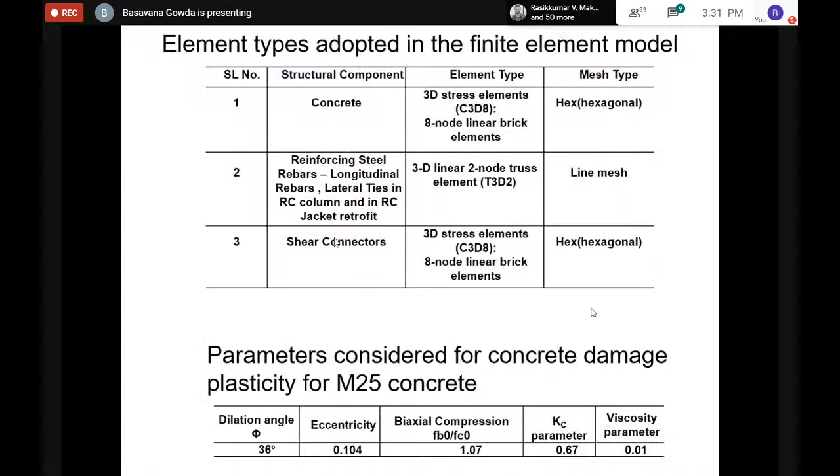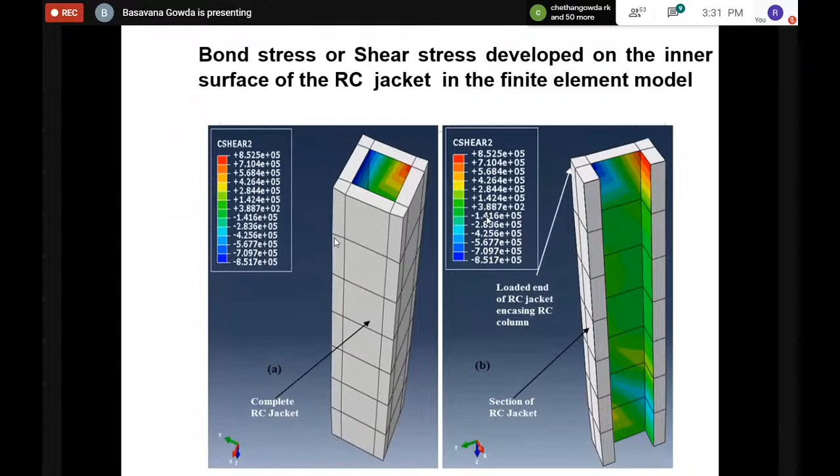That was the main thing we wanted to see because the epoxy we were trying to use was not giving us confidence. So we wanted to see that and then apply it. When doing seismic retrofits like this, we need to do these kinds of analyses to gain confidence and to make the structure safe.

Now I'll briefly talk about structural controls. Structural control is meant to bring down the displacements in a building subjected to earthquake. They are basically passive, active, and hybrid controls. I'll talk about passive control here. Passive control does not make use of a computer system. Active control makes use of a computer system and an actuator to control the structural components used to reduce displacement. Hybrid makes use of both passive and active.

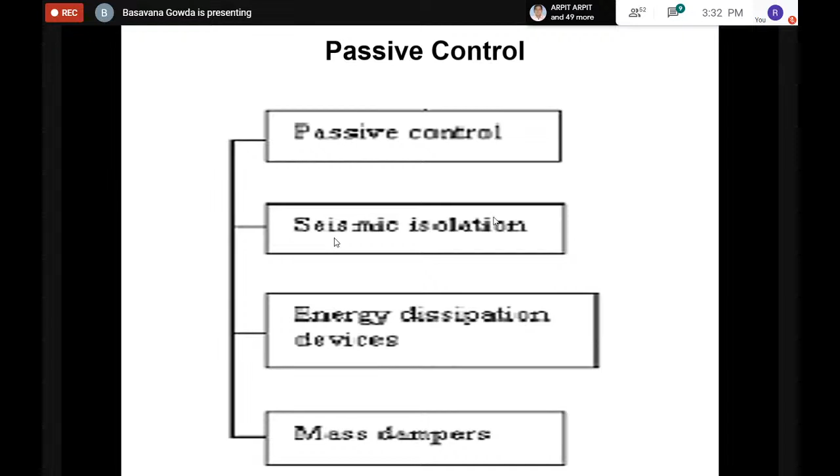I'm sorry, there's been smudging of this figure, I apologize. Passive control is basically seismic isolation, base isolation, energy dissipation devices like dampers, and mass dampers like tuned mass dampers. I'd like to talk briefly about base isolation, where the base isolators are provided between the superstructure and the foundation. There are different types of isolators: elastomeric bearings, lead rubber bearings, and friction pendulum type.

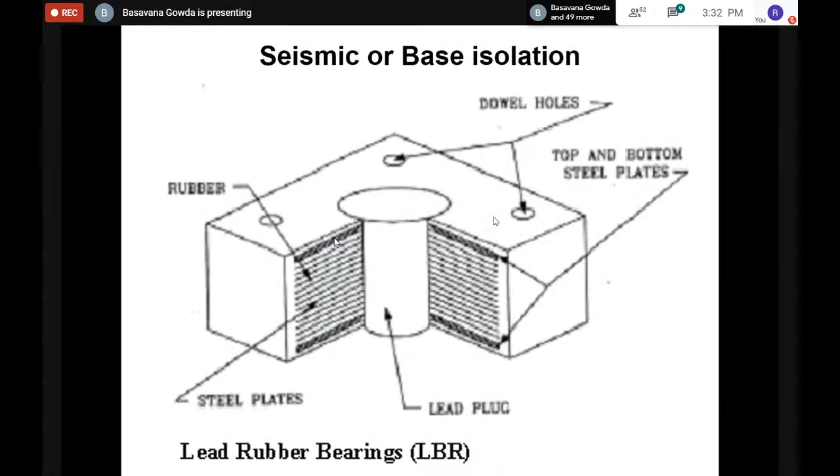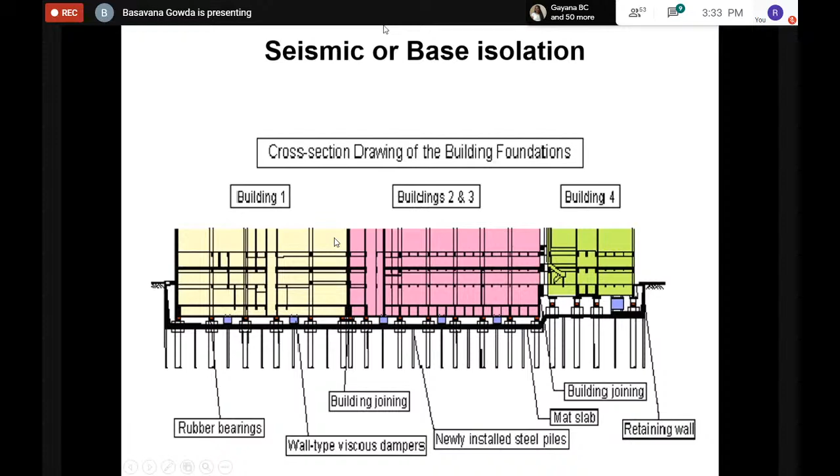The next type are energy dissipating devices, which are bracings with dampers in them. I would like to talk about viscous dampers very, very briefly.

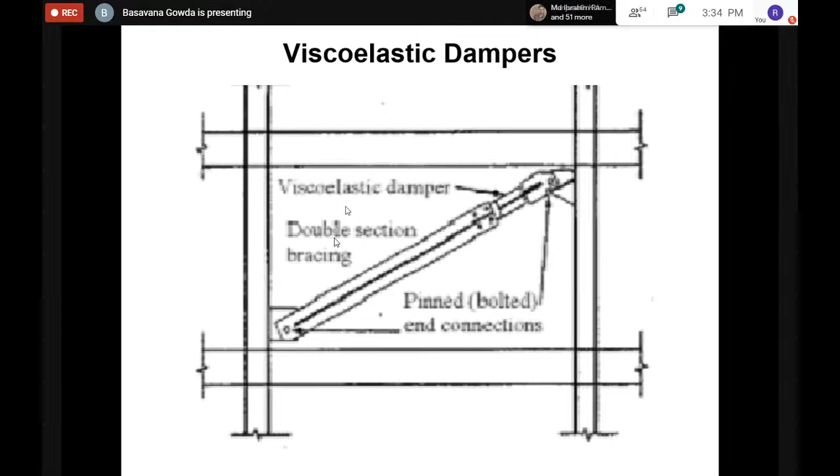These are the viscoelastic dampers which you can install in buildings diagonally between beam column joints in this way, to improve the ductility of the structure. You can see the sizes.

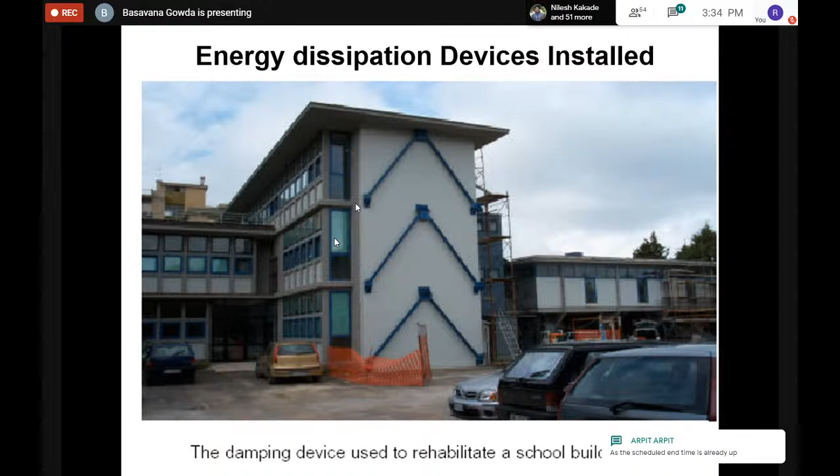The next is the tuned mass dampers. Very briefly, tuned mass dampers reduce the displacement, especially the drifts, in very large, tall structures.

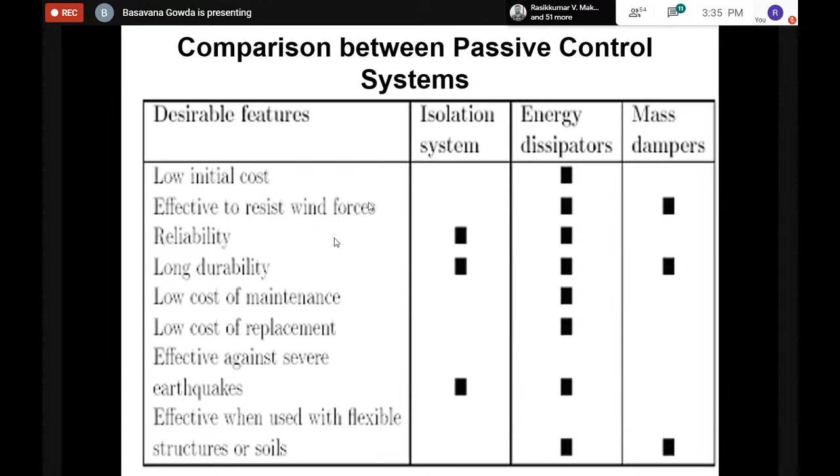Now, the whole point I would like to conclude here. I'm sorry, I've taken 5 minutes of your time.

Yes, the time is up. I would like to conclude here and put it on record: we need to make our structures, whether being constructed now or already designed, use existing measures to cater to strength, stability and economy, to make the structure ductile such that it does not collapse, causing fatalities. Thank you, I'm sorry I've taken 5 minutes of your time.